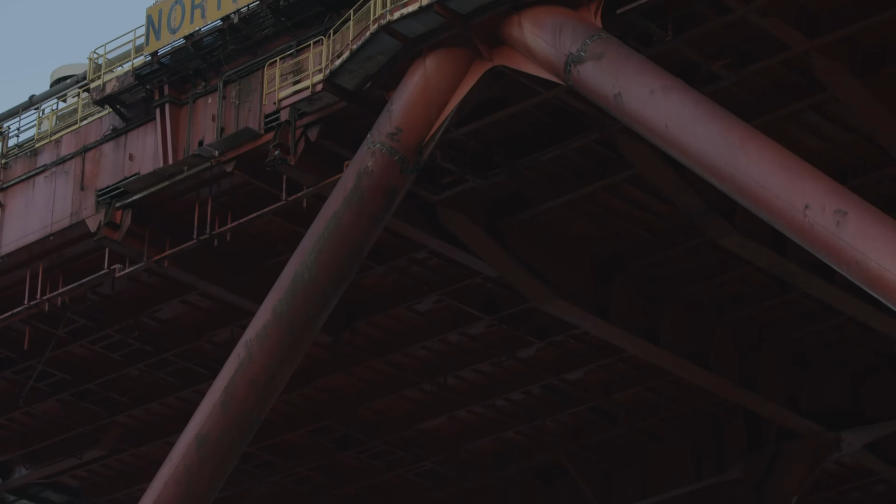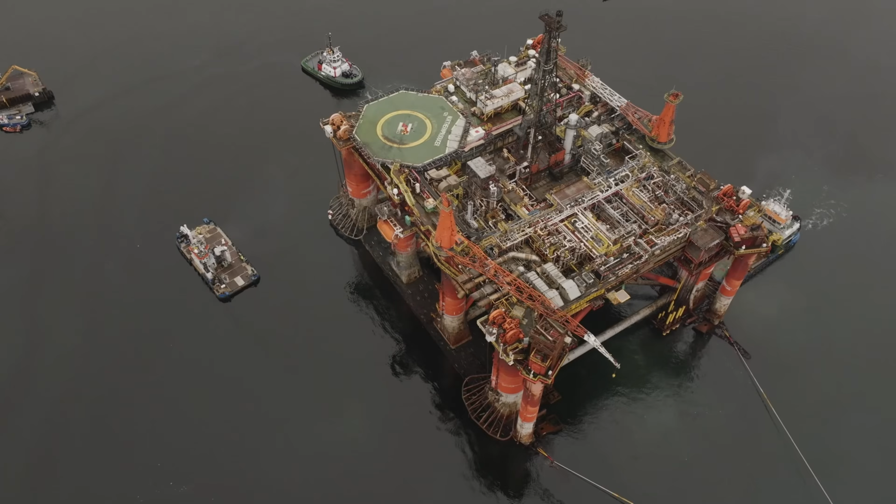Liberty Industrial was engaged by Qualamar Shipping Limited, Northern Offshore UK Limited, for the decontamination, demolition and disposal of the Northern Producer floating production platform. Constructed in Norway in 1976, the Northern Producer operated for over 40 years as an oil drilling rig in the North Sea and floating production facility before being decommissioned in 2021 and relocated to Kishorn, Scotland in 2023 for decommissioning.

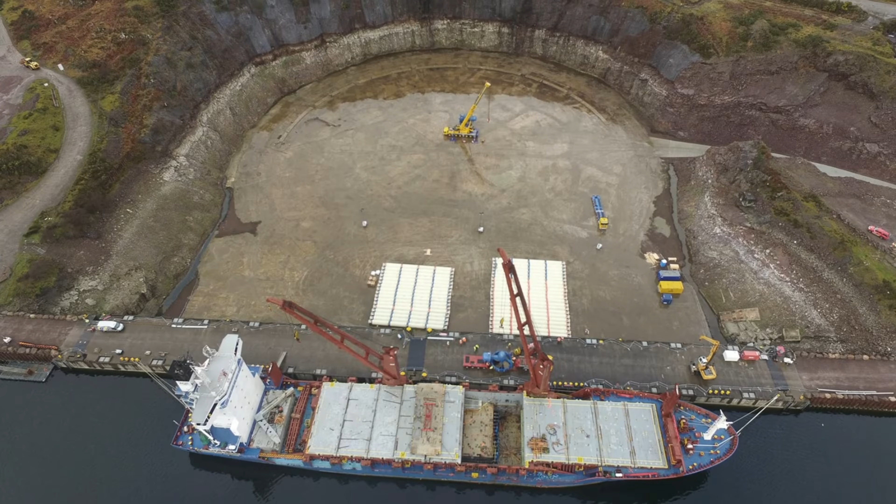In a first-of-its-kind approach for such an asset, Liberty Industrial leveraged international experts to assist in developing the explosive methodologies as part of a 10-month program to decontaminate, decommission, demolish, recycle and dispose of the platform in a dry dock. Located in the remote northwest of Scotland, Kishorn Port is approximately 2 hours' drive west of the nearest large city of Inverness.

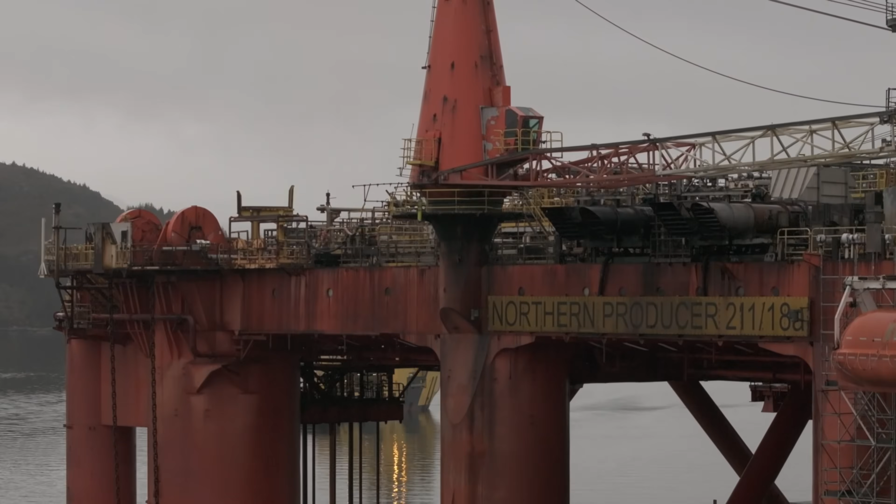The platform, weighing in at 11,200 tonnes, was transported via floating techniques, utilising multiple port tugboats and experienced crew to carefully position the vessel in the precise location for the future blasting event.

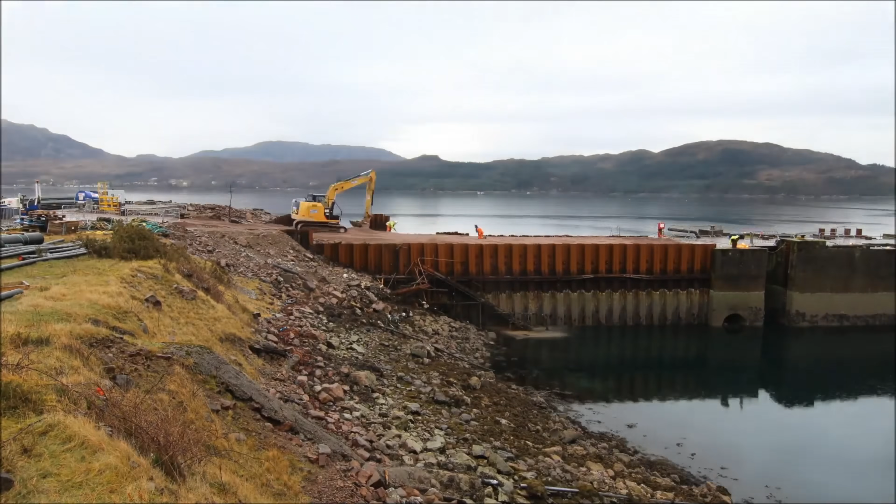Once in the dry dock, the gates were floated back into position and sealed to enable the dock to be pumped and drained free of its 250,000 cubic metres of water over a period of 2.5 days. As the water level decreased, the vessel slowly lowered to come to rest on the dock slab.

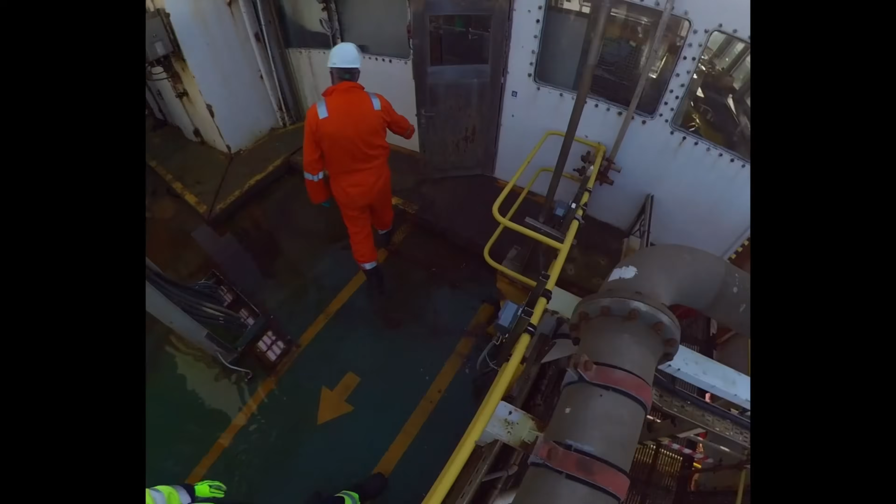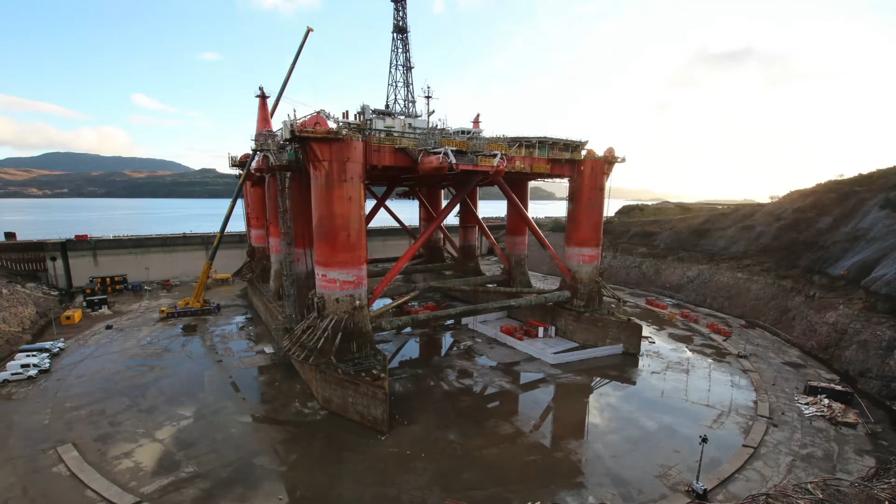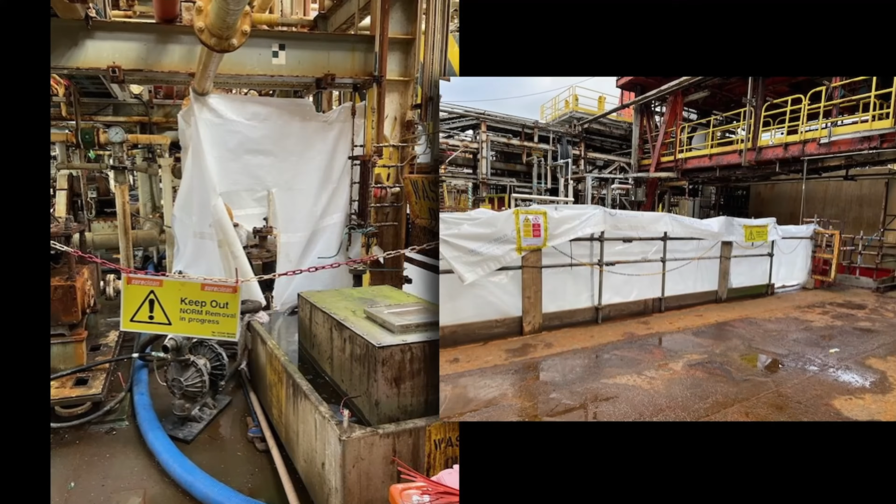The Liberty Industrial team commenced removal activities of the internal furnishings and completed removal of asbestos-contaminated materials and vessel fuels. Additionally, in parallel with this, a team of expert contractors commenced the de-energisation of some live electrical and service systems and the removal of NORM-contaminated materials from the process systems.

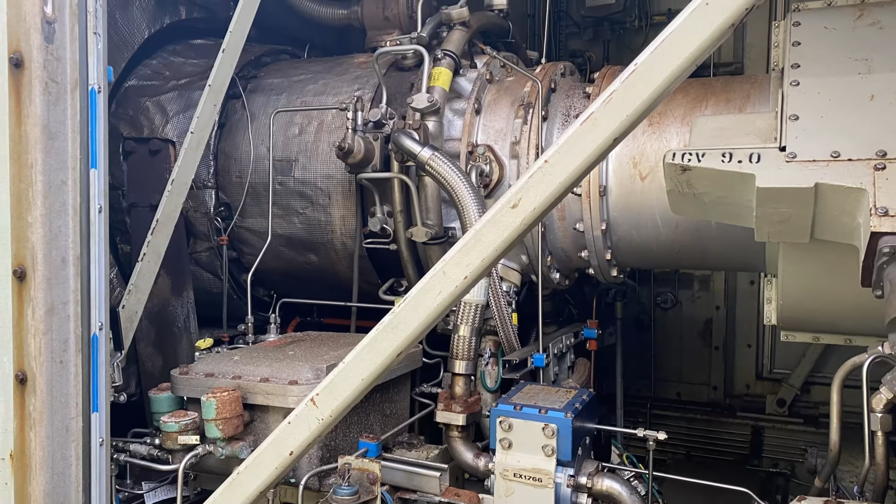Towards the end of this process, some reusable plant and equipment were identified, dismantled and recovered, including 5 Solar turbine generators and gearboxes, and valuable electrical instrument control items. These were all sold to others for refurbishment and reuse, along with the vessel's 4 lifeboats.

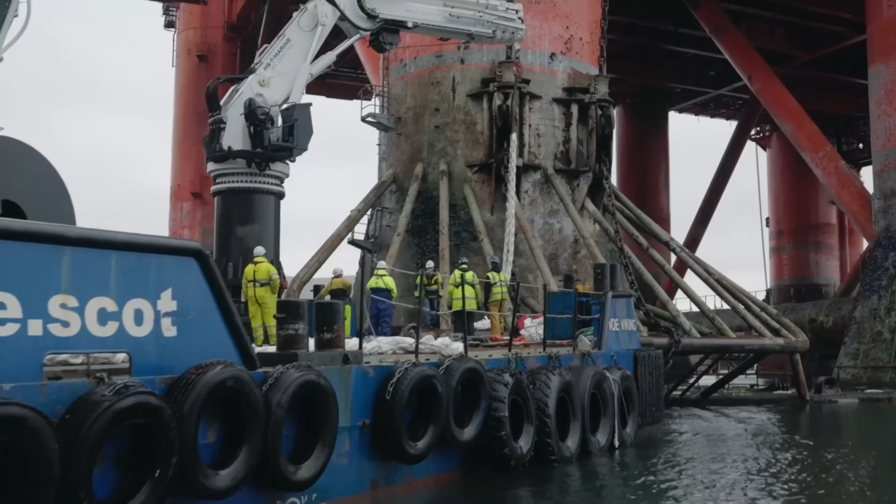To complete these tasks and activities on top of the unpowered 35-metre high platform, a combination of labour was used with a materials hoist and 150-tonne cranes, mobilised as required throughout the 7-month process. In total, more than 650 tonnes of hazardous material and equipment were removed from the platform prior to the Explosive Blowdown event.

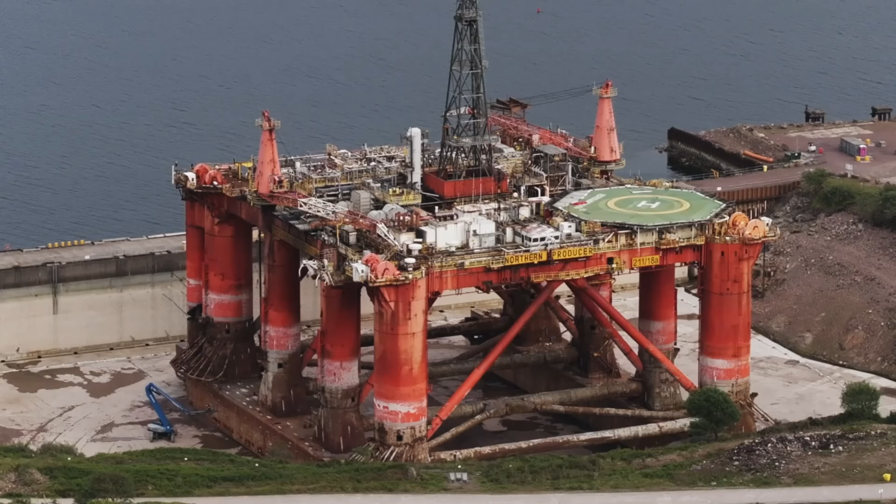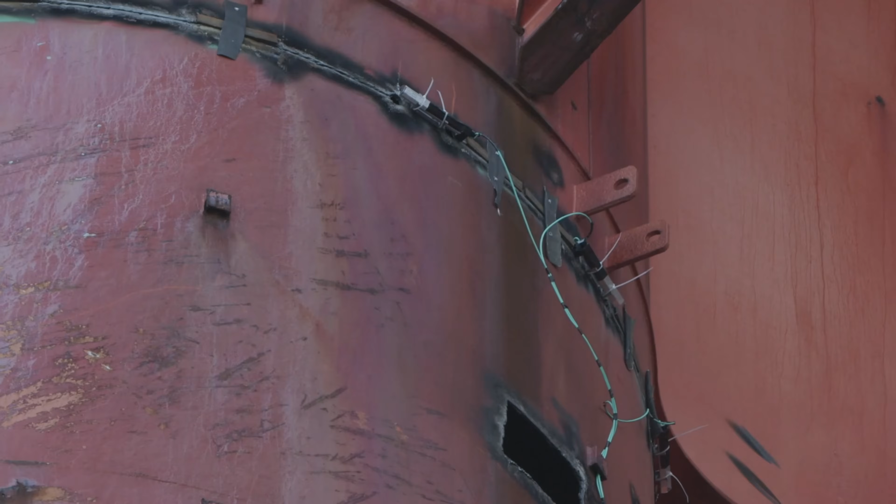In order to bring the platform's topside to ground level as quickly and safely as possible, Liberty Industrial completed engineering reviews that confirmed the feasibility of the use of explosives and structural pre-weakening cuts, while preserving the integrity of the dry dock's floor and walls.

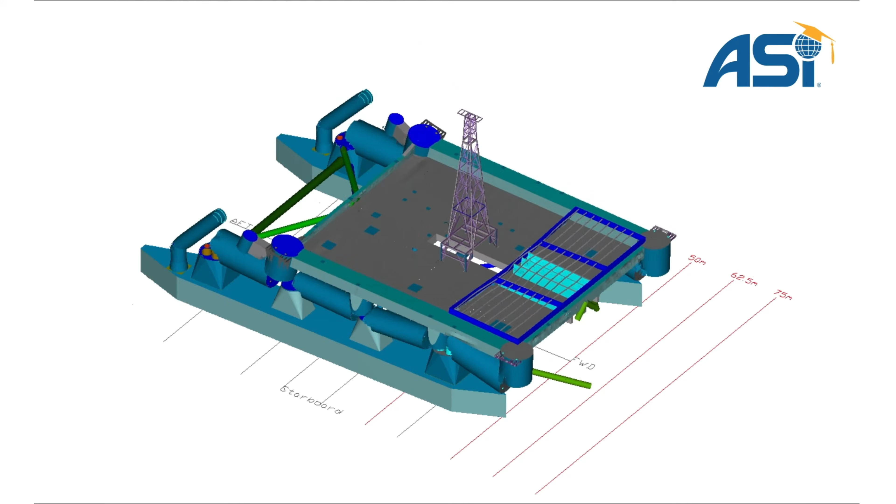Liberty Industrial's management team engaged and collaborated extensively with PDC and ASI to generate accurate animations on the mode of collapse and derived a demolition design that precisely controlled the direction of fall, while minimising work on site.

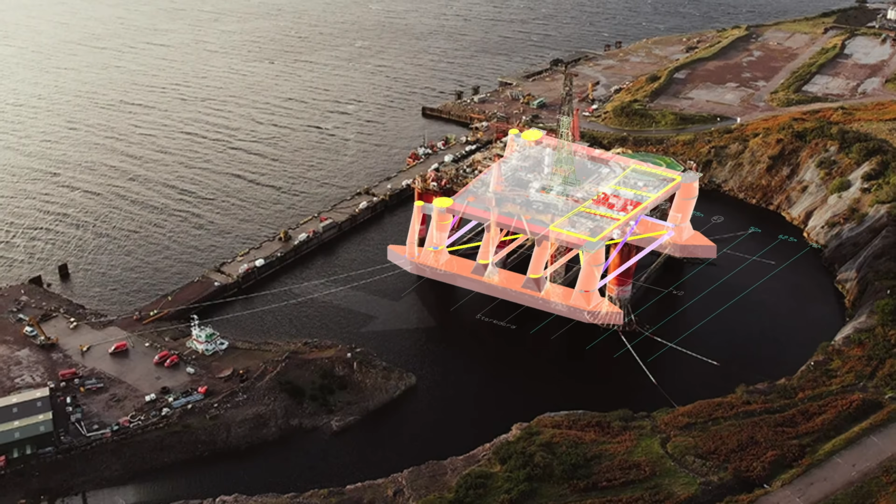This design was realised by pre-weakening from the inside of the columns, cuts to the top and bottom of 8 key structural columns, and external cuts to a further 22 structural members, allowing the structure to fall without rotating in the direction of the bow and away from the dry dock wall.

Internal cuts were completed without incident, with confined space rescue teams in place throughout the entire process.

The design included the provision of over 4,500 tonnes of crushed rock to act as an impact cushion at the predicted dry dock floor touchpoints. This rock was procured from the neighbouring quarry.

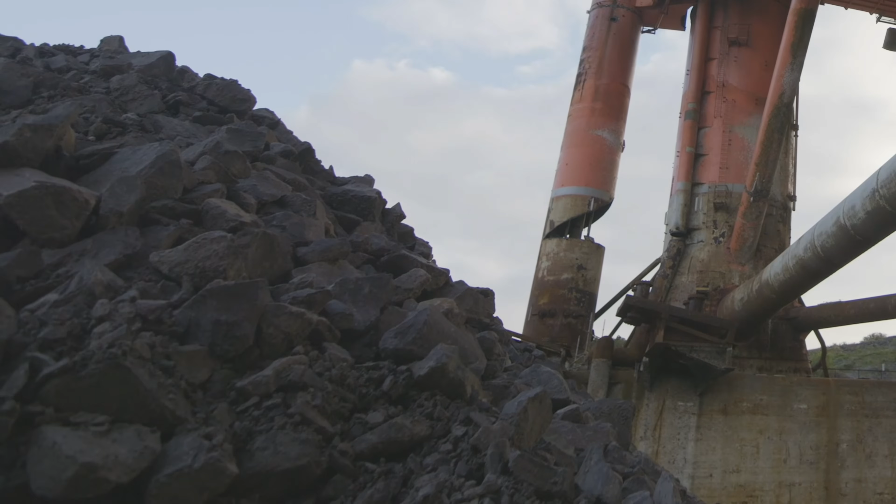Finally, the structural design recommended a 600-metre exclusion zone, which was patrolled using sentries and a local roads traffic management subcontractor.

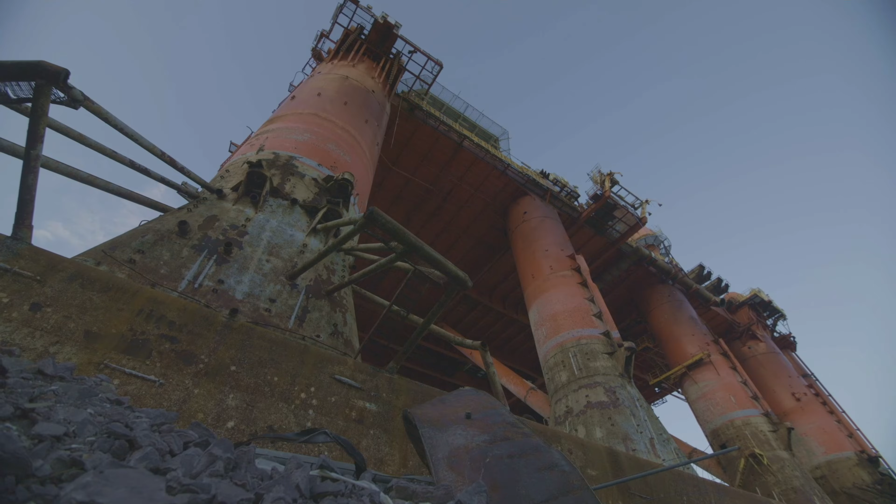As the pre-weakening activities progressed, torsional and misalignment challenges unfolded. Over 200 kilograms of explosives and over 300 cutting charges were strategically placed at these 38 cut locations to make this blowdown one of the largest single-use of explosive events at a demolition site in Europe at the time of the project.

After months of material removal and project planning, it was time for the Northern Producer to come crashing down, and it did, in spectacular style.

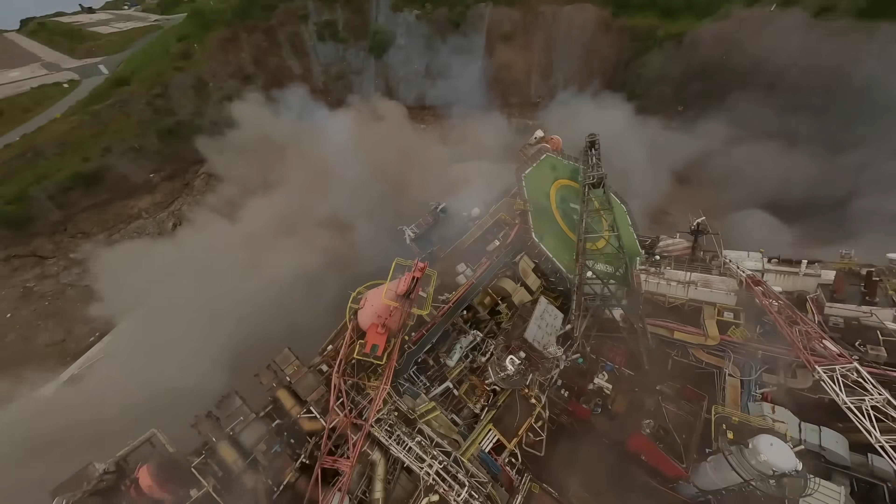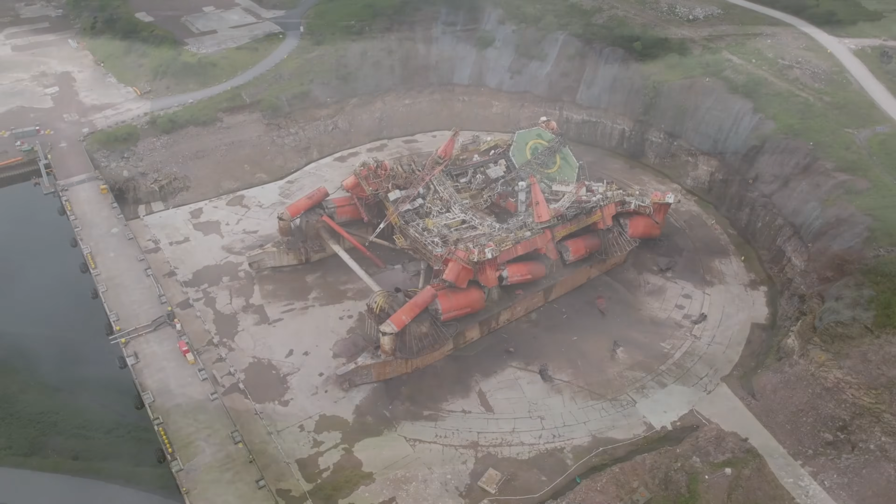Following the successful blowdown of the 11,200-ton structure, the Liberty Industrial team got to work on downsizing and further recycling.

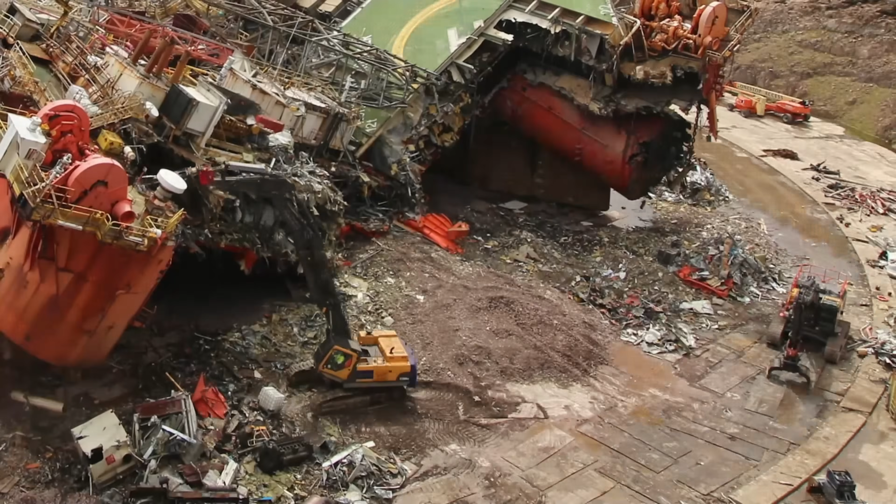95, 85, 70 and 55-ton excavators with shears, grabs, magnets and material handlers were mobilised, with the two larger machines having to be shipped in using barges, given local road limitations for moving machinery of this size.

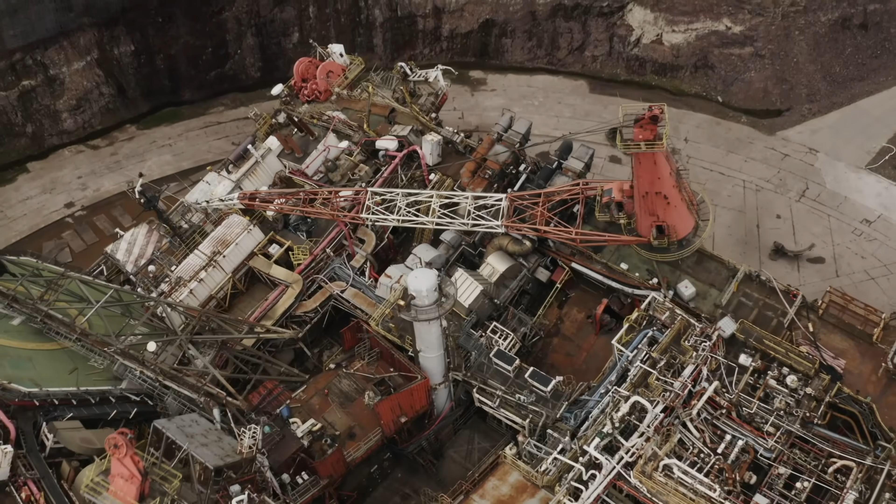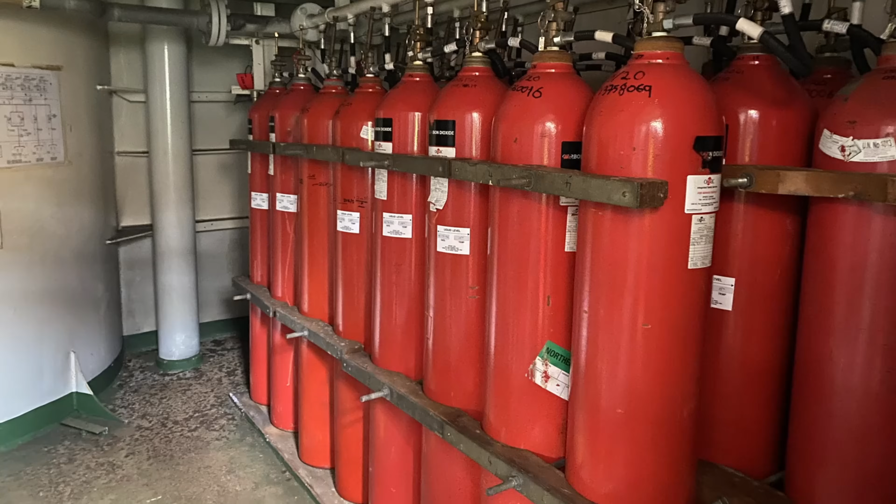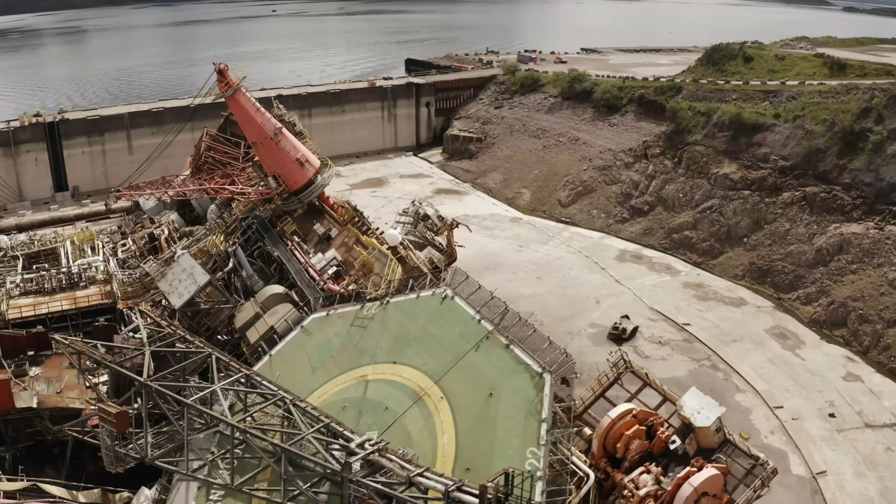Besides the complexity and success of the blowdown activity, this project incorporated a circular economy focus. This saw, with Scottish Environment Protection Agency approval, the repurpose and reuse of many items, including 42 tonnes of marine waste sent for recycling as fertiliser for local farms, and operational memorabilia, which was collected and sent to museums for historical preservation.

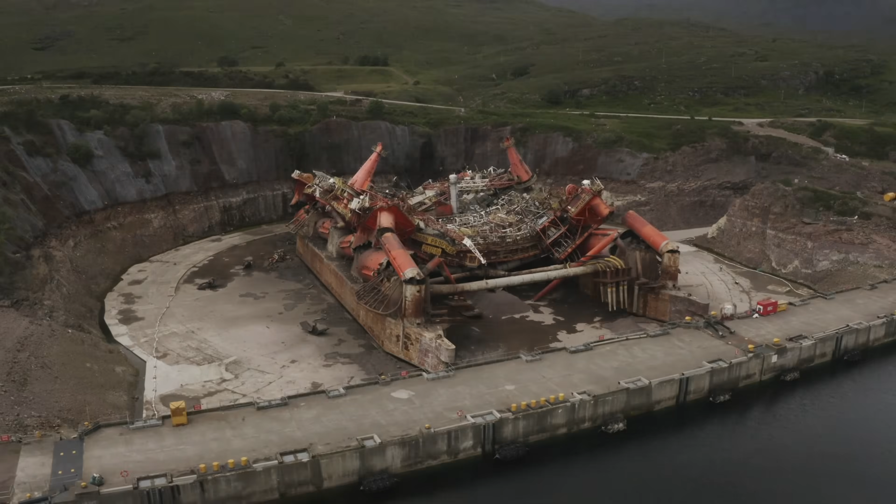All in all, Liberty Industrial's recycling efforts are expected to achieve an impressive 97 to 98% rate for recycling and material reuse. The Northern Producer Decommissioning Project, the second only awarded to Liberty Industrial in the UK, successfully executed the blowdown on June 13, 2024.

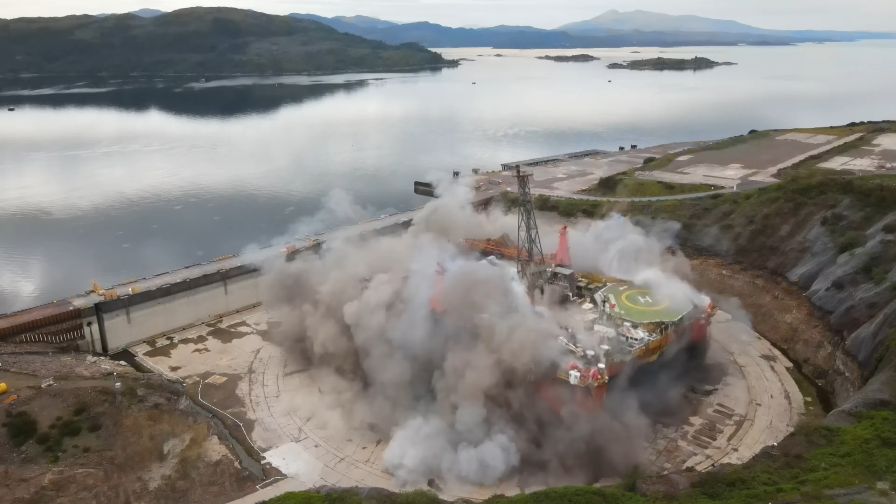The unique project completed a blowdown that featured an innovative explosive design that evolved to meet site challenges, all validated with ASI's 3D modelling extreme loading software, sympathetic to the dry dock environment, and with a skilled workforce pre-weakening and installing an elaborate web of explosives that was executed and fell as predicted without incident.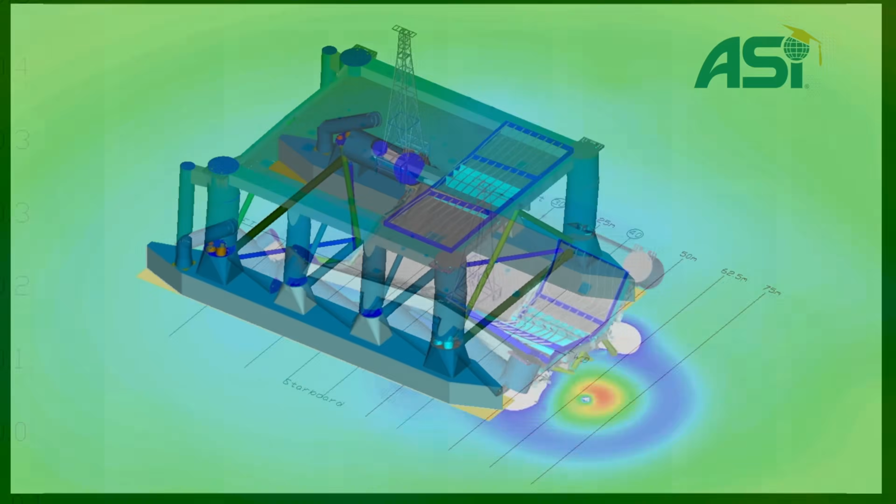The project is scheduled to be completed on time, on budget, without any health, safety and environmental recordable incidents, and in line with stakeholder expectations.

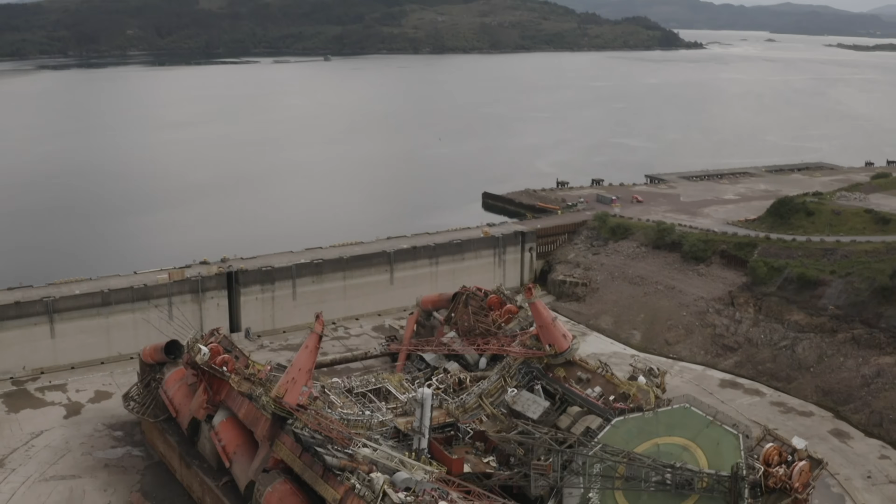Liberty Industrial has again delivered innovative approaches in yet another first of its kind, cementing their position in world-class demolition operations.